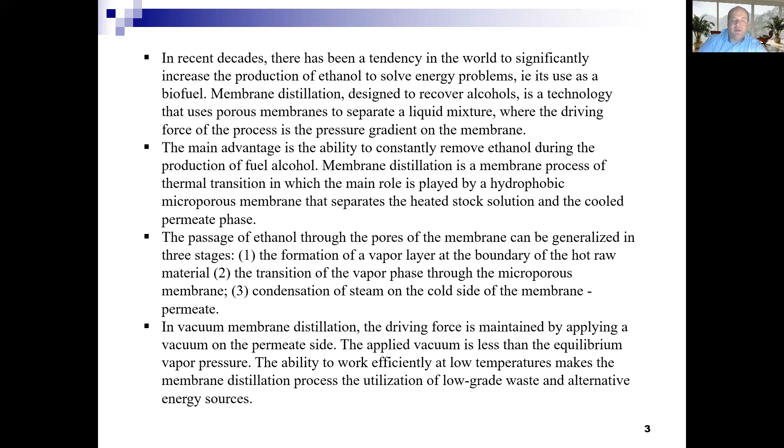In vacuum membrane distillation, the driving force is maintained by applying a vacuum on the permeate side. The applied vacuum is less than the equilibrium vapor pressure. The ability to work efficiently at low temperatures makes the membrane distillation process suitable for the utilization of low-grade, waste and alternative energy sources. Here on the slide, you see the calculating scheme of the process of vacuum membrane distillation.

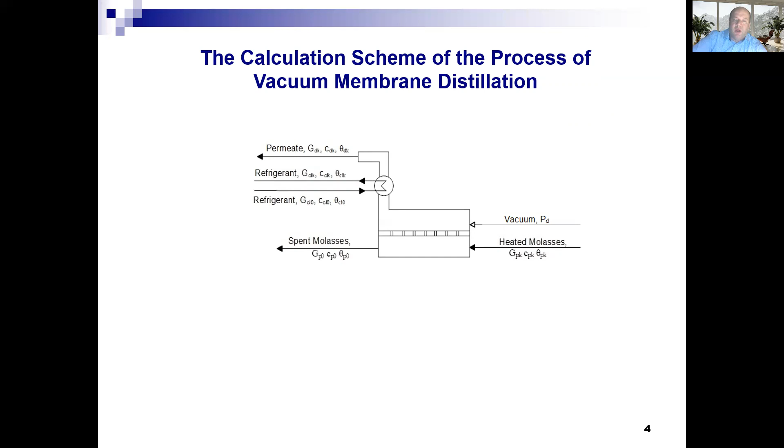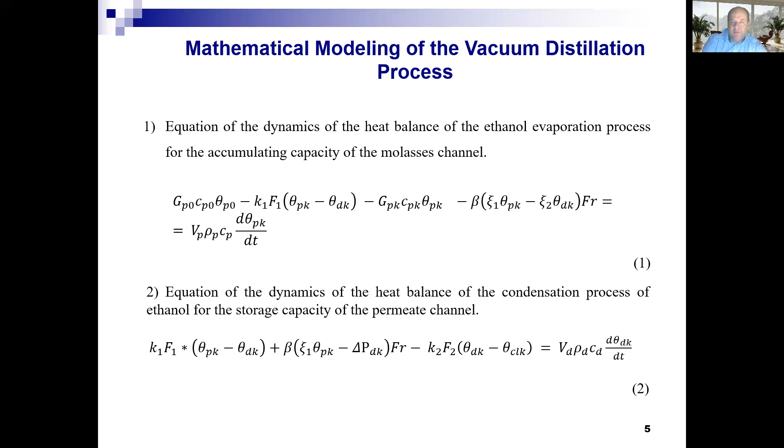Here you see the mathematical model of the vacuum distillation process: equation of the dynamics of the heat balance of the ethanol evaporation process for the accumulating capacity of the molasses channel, equation of the dynamics of heat balance of the condensation process of ethanol for the storage capacity of the permeate channel, equation of the dynamics of the heat balance of the transfer from the condensation process of ethanol to the refrigerant, equation of the dynamics of material balance for the accumulating capacity of the molasses channel, taking into account the change in the concentration of ethanol in the molasses solution and the vapor diffusion through the membrane.

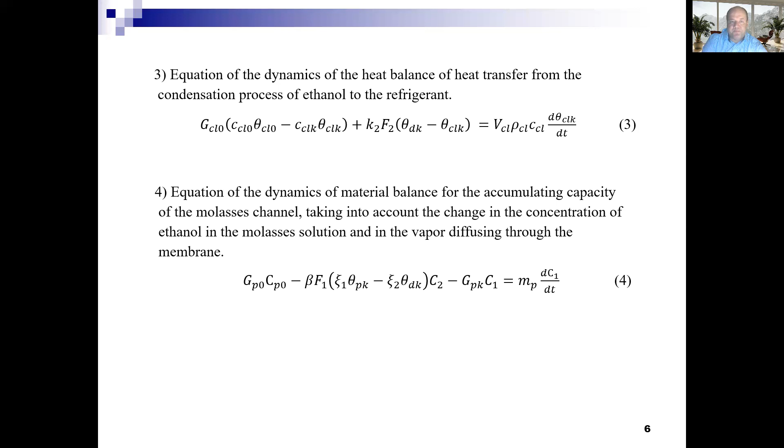The essence of the MPC approach is the following scheme of control of the dynamic process on the principle of feedback. A mathematical model of the membrane distillation process is considered, the initial conditions for which are its current state. With a given control, the model equations are integrated, which gives a forecast of the object motion over a certain finite period of time. Optimization of program control is carried out in order to bring the adjustable variables of the forecast model closer to the corresponding set signals on the forecast horizon. Optimization is performed taking into account the whole set of constraints imposed on regulatory and adjustable variables.

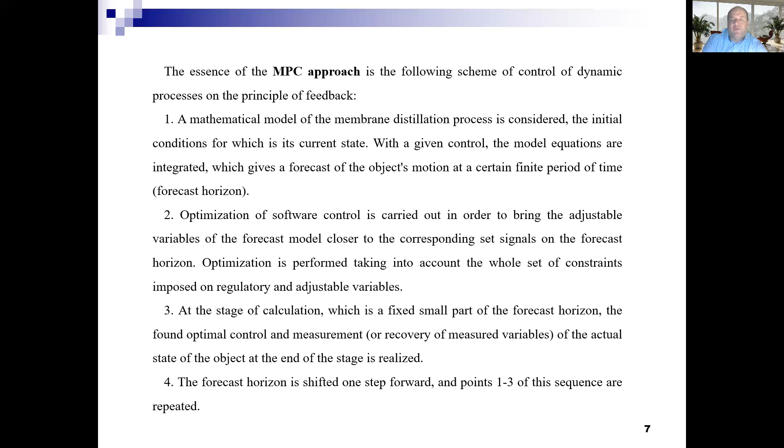At the stage of calculation, which is a fixed small part of the forecast horizon, the found optimal control and measurement of the actual state of the object at the end stage is realized. The forecast horizon is shifted one step forward, and points 1 to 3 of this sequence are repeated. We use the control problem with a linear model and quadratic functional. Let the control object be described by a linear system of differential equations of the form. To assess the quality of the control process, a quadratic functional is introduced.

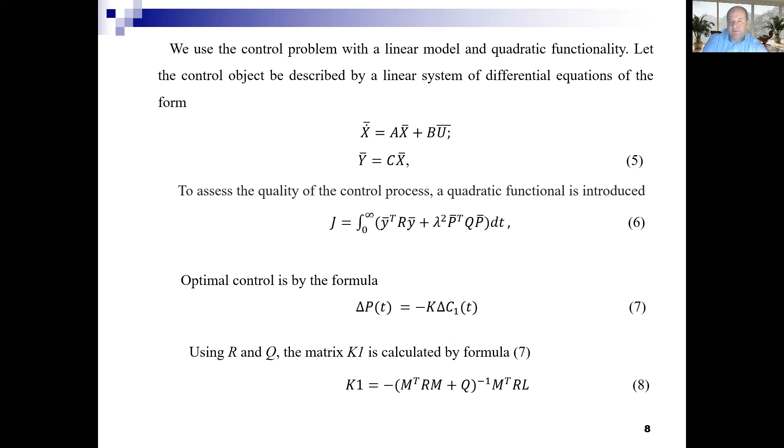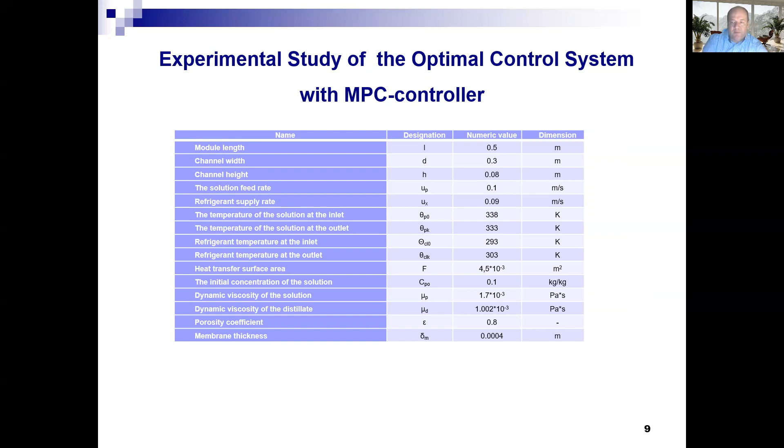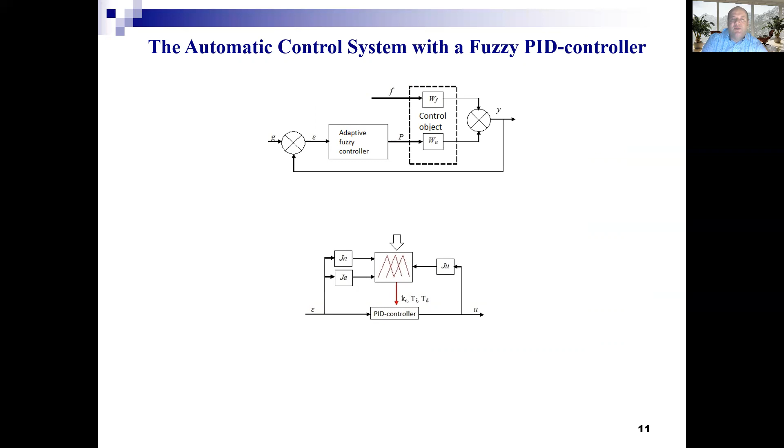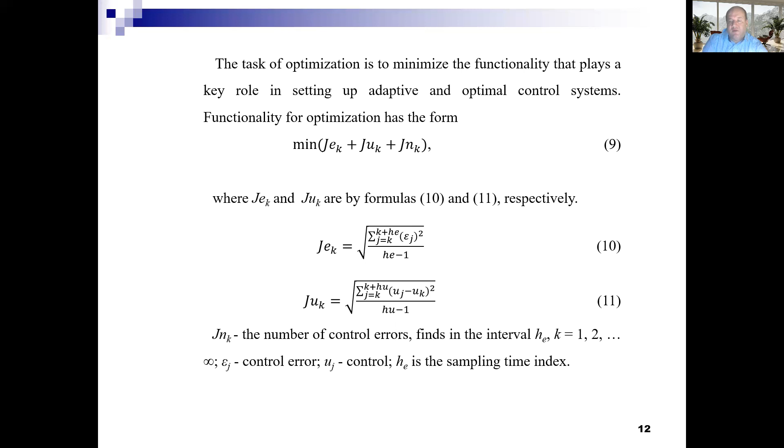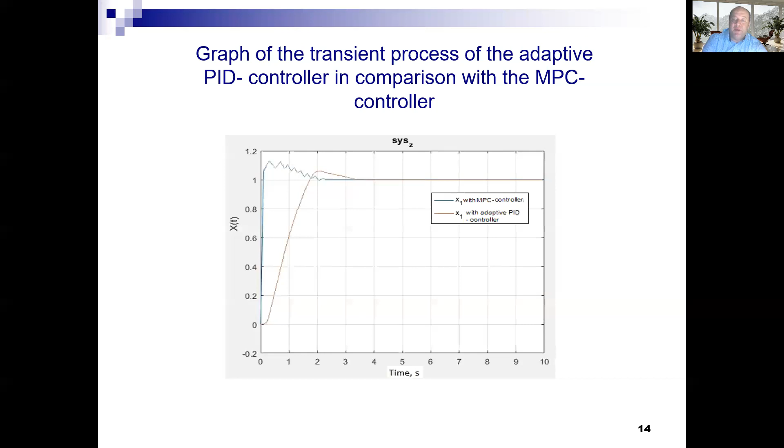The process of membrane distillation in bioethanol production is considered. The work is devoted to solving the problem of designing and researching the control system of the vacuum membrane distillation process. In vacuum membrane distillation, the driving force is maintained by applying vacuum on the permeate side. A vacuum of less than equilibrium vapor pressure is applied. Condensation occurs outside the membrane module.

Analysis of previous work has shown that the process of vacuum membrane distillation in the production of ethanol for biofuels, and the model of the process, is insufficiently researched. Existing models are difficult and sometimes impossible to apply in control systems. Therefore, a mathematical model of the dynamics of mass and energy transfer in the process of ethanol separation using vacuum membrane distillation for control purposes has been developed. The pressure in the permeate channel was chosen as the control effect.

This paper is devoted to the comparison of control systems for vacuum membrane distillation using an MPC controller and a PID controller with fuzzy logic. The developed control system must maintain a given concentration of ethanol in the solution at the outlet of the membrane module, which in turn should ensure the desired quality of the source material and the normal course of the process.